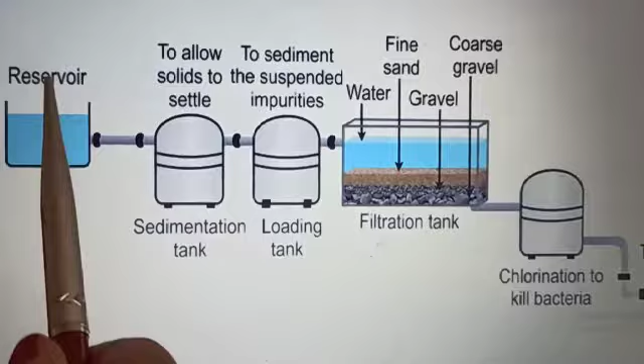See, the reservoir is there, you can see the whole apparatus. First the water is collected into the reservoir, then transferred into the sedimentation tank, where the solid impurities settle down. After the impurities settle, this clear water is transferred into the loading tank.

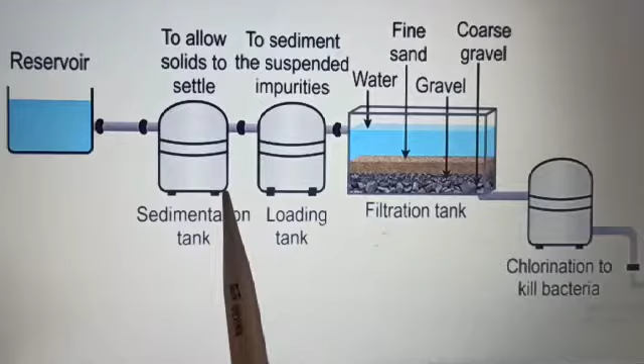In the loading tank, some alum is added. This alum helps in settling the fine particles, since the big solid impurities are already settled in the sedimentation tank. The fine particles left in the water are settled with the help of alum in the loading tank. Then this clear water is transferred into the filtration tank, where there are three layers.

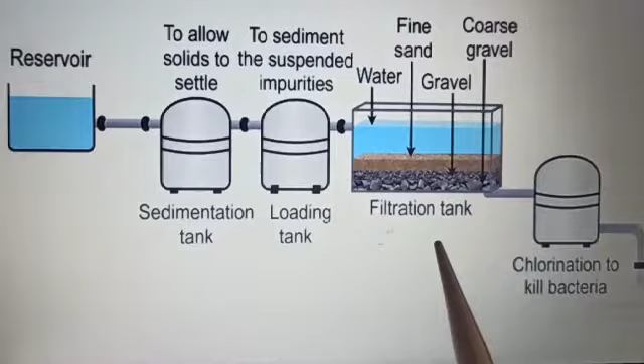You can see this is the filtration tank, a traditional method of purifying water. The first layer is fine sand, the second layer is gravel, and the third layer is coarse gravel.

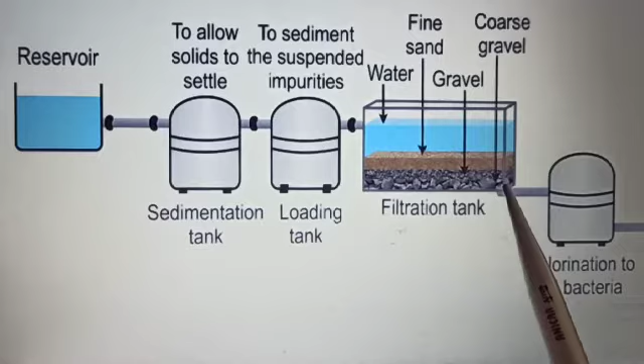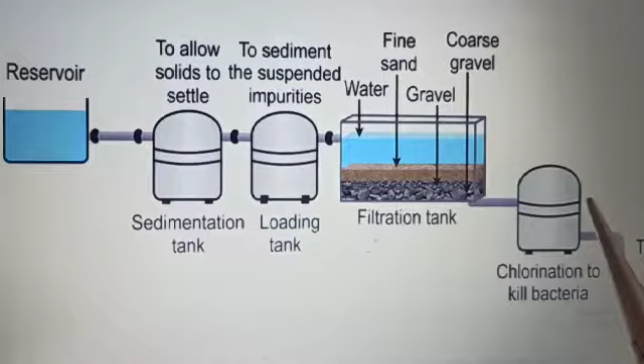From the bottom you can see the water is filtered properly, and then this filtered water comes through the pipe into the chlorination tank, where the water is purified, or made germ-free, by the use of chlorine. Then this water is supplied to homes for domestic purposes.

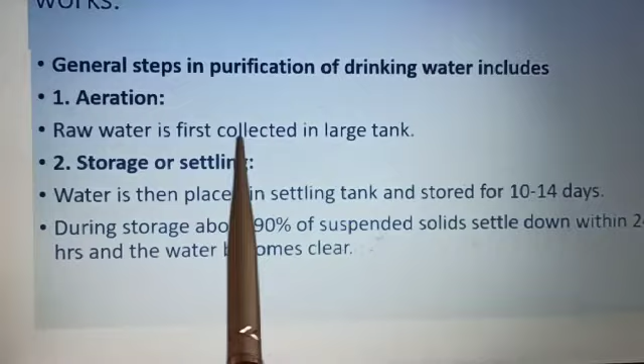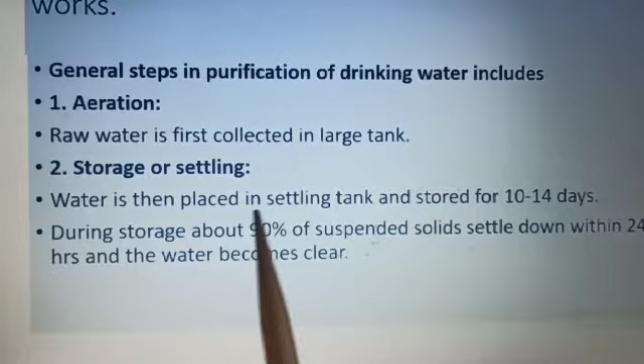See the steps, how all these are done. First the water is collected into large tanks, then after the reservoir, the water is transferred into the settling tank, where it is stored for 10 to 14 days. During this storage, about 90% of suspended solids settle down within 24 hours, and the water becomes clear.

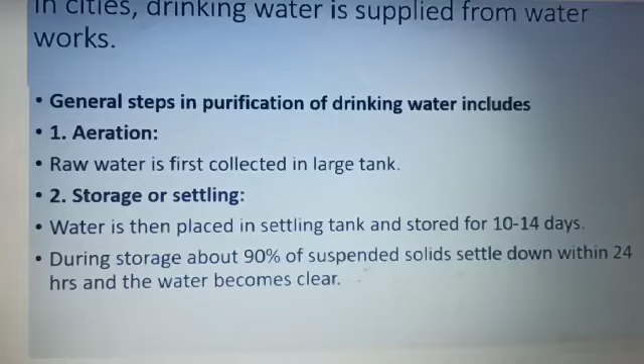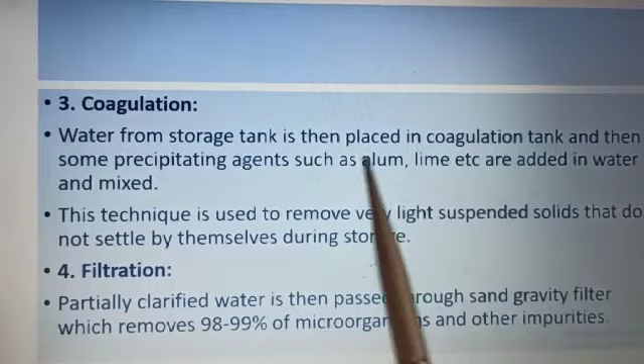Then coagulation is done, meaning water from the storage tank is placed in the coagulation tank, and some precipitating agents like alum or lime are added to the water and mixed.

What is the function of alum? You can see this at home. If you take a glass of water and add some mud from a flower pot, you will see it's not settling down. The big particles will settle, but some fine particles will still be there which don't settle easily. If you add a small piece of alum, you will see the water becomes clear — all the impurities settle down easily.

So what is the function of alum? It helps coagulate the fine particles. How is this process done? The fine particles present in water are changed by alum into big particles through coagulation. These fine particles join together to make big particles, which then settle down easily.

You have done this term, sedimentation, before also. You know that sedimentation means settling down of solid particles. So this technique is used to remove very light suspended solids that do not settle by themselves during storage.

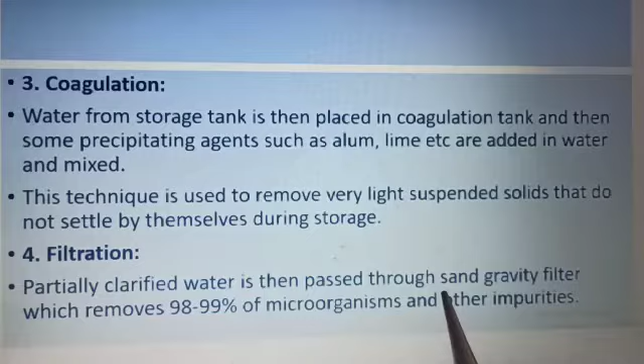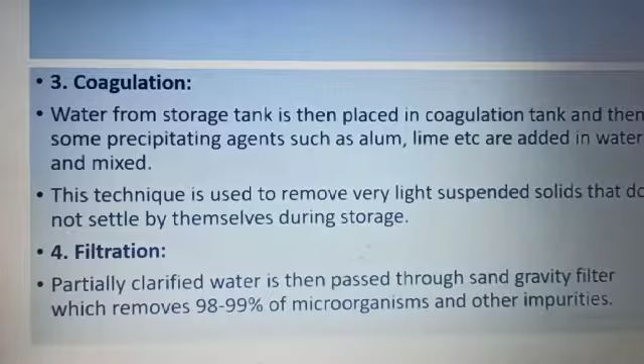Then filtration: partially clarified water is passed through a sand gravity filter, which removes 98 to 99% of microorganisms and other impurities. You know that in the filtration tank, even microorganisms are removed.

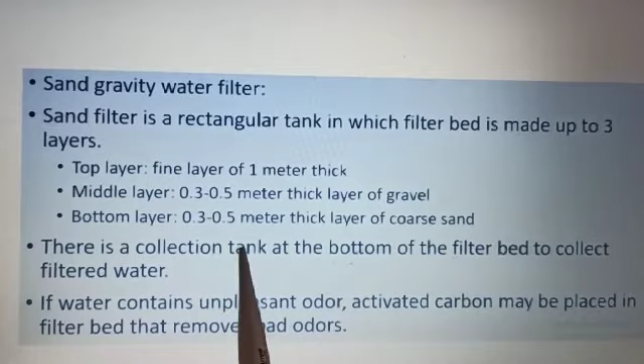If water contains unpleasant odor, activated carbon may be placed in the filter bed to remove these bad odors of the water.

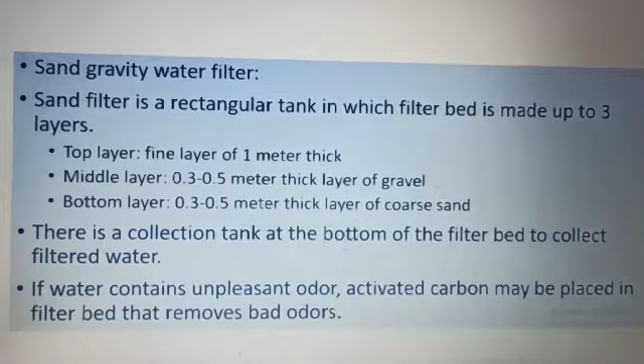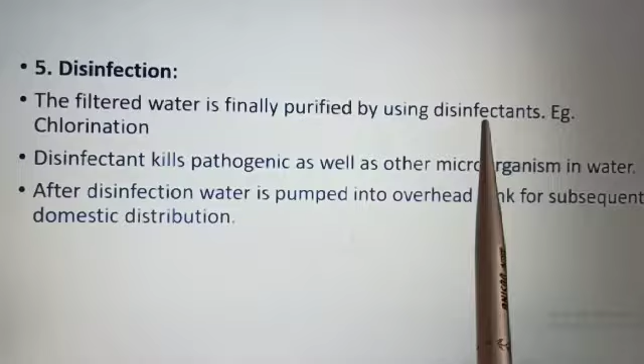The last step is disinfection of the water. The filtered water is finally purified using disinfectants, for example chlorination is done, and the disinfectant kills pathogenic as well as other microorganisms in the water. After disinfection, the water is pumped into the overhead tank for subsequent domestic distribution.

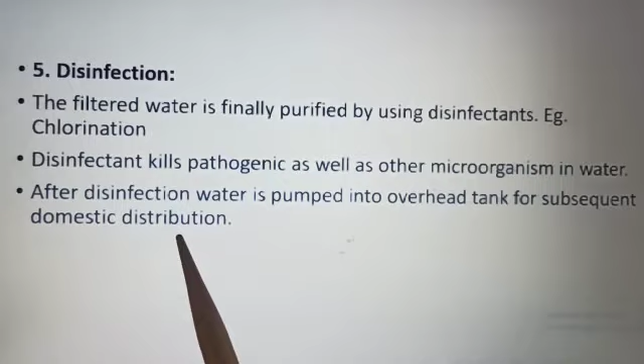So in this way, pure water is supplied to homes. Thank you.